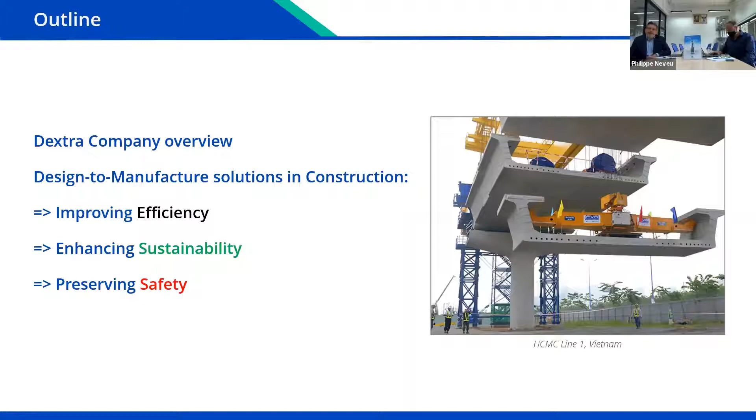So let's start. Very briefly about Dextra. We are a French company with the particularity to be established and headquartered in Southeast Asia since 1983. Actually, our home base is Bangkok, Thailand. And we are now from Asia operating worldwide with various facilities, manufacturing facilities in Thailand, in India, and in China, and around 900 collaborators worldwide.

So just to illustrate a little bit for you what we do, we are in a business of what we call connectivity and structural integrity for construction. So what it means is we have many solutions, technical solutions that we design and manufacture, which are going inside those infrastructure that you see and that you use every day.

Starting from what we call concrete reinforcement products, which are solutions to connect reinforcement into concrete structures. Then we have a range of solutions for what we call engineered bar systems that are mostly to support roof, facade, as well as to put a structure into tensioning, like a bridge structure, as well as ground anchoring. And then we have a specific geotech product line, so solutions to anchor those structures into the ground and to stabilize the ground, solutions for tunneling, like rock bolting.

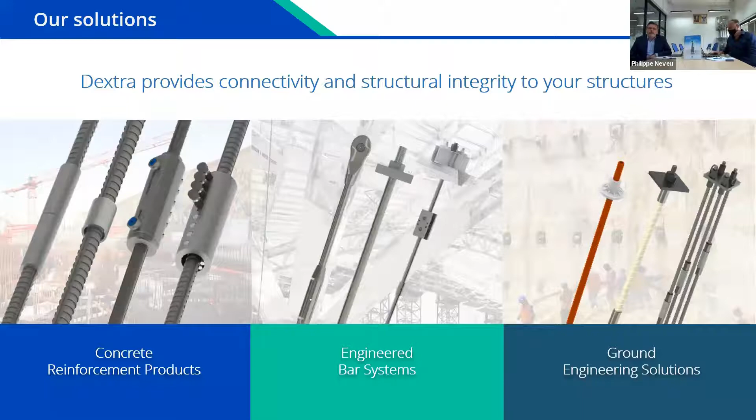And now I will leave Philippe talking to you about efficiency and how this DFMA approach for infrastructure projects can enhance efficiency for your project.

Okay, then good afternoon, everyone. So I'll be trying to be efficient in talking to you about efficiency in construction, and we will basically cover that topic from the approach of the DFMA. For those who are familiar with that acronym, it's Design for Manufacture and Assembly in Construction.

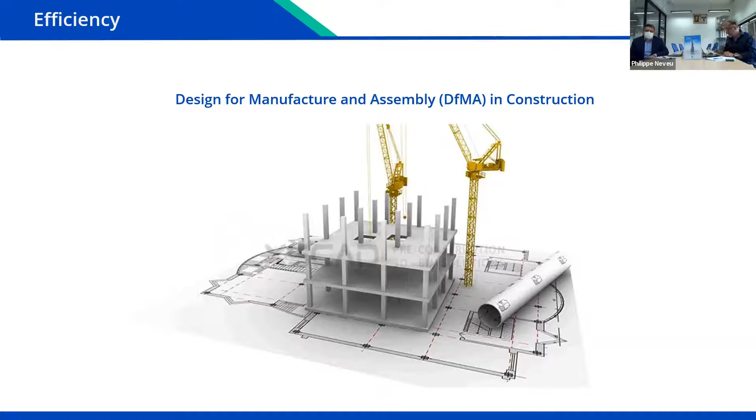So that means that we will, from the beginning, I mean from the design stage, actually consider the easiness of manufacturing the elements or the parts of the construction, and at the same time how to assemble those parts all together. We will see later, we will be talking about prefabrication, off-site fabrication. So there is an issue with the assembly of what has been manufactured off-site. This is why we call it design for manufacture and assembly.

To start with, actually, we have listed basically the main concepts that need to be addressed in pursuing this efficiency, and it starts actually with the definition and the observance of construction standards. I will not go through them extensively because you're probably familiar with them. The idea behind it is that there is a group of players in construction accepting a certain number of standards that may vary from one region to another. And the idea to start this DFMA approach is to follow or comply with established and well accepted standards. This is basically what we do at Dextra in all of the markets we are approaching.

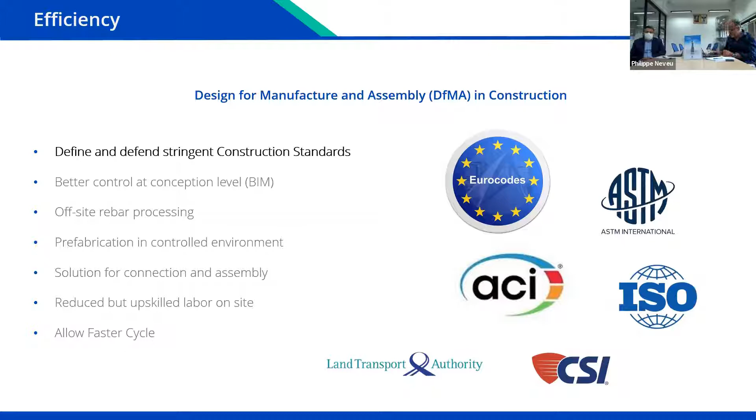Once the standard is defined and accepted, we move to the next step, which we generally call BIM - a principle supported by software that helps, from the design stage, anticipate all the future construction constraints you may be facing during the production of the building, tunnel, or any construction.

We also support this with a number of libraries that help designers integrate products. It's true for Dextra, but the idea is that it must be true for the entire scope of construction. This is the second step that needs to be observed to ensure better preparation of the construction, and maybe more importantly, to anticipate any issues on site before the actual production of the project.

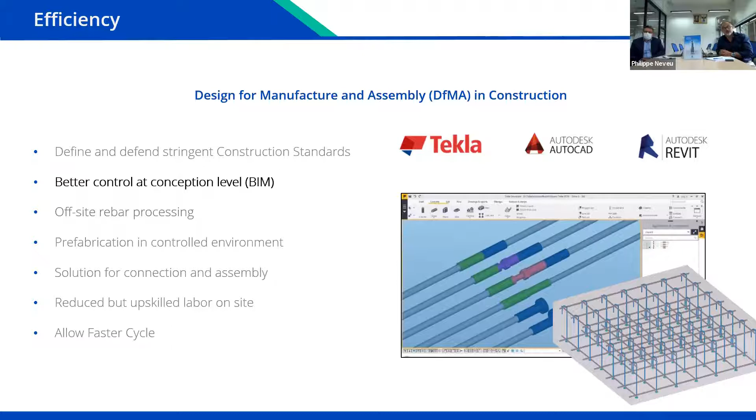So, pursuing this search for efficiency in practice, we see it starting in our business from the rebar processing. Rebar is an important part of any concrete construction, because concrete never goes without reinforcing steel. So rebar processing actually starts off-site.

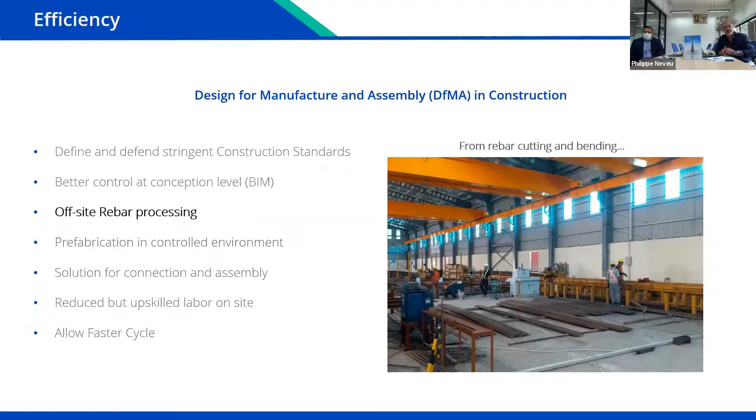The idea here is to have better control in a clean environment. You can see here a workshop that is covered, so if it's raining there's no issue with the processing of the rebar. This better environment helps to be more efficient in the preparation of the steel rebar, which starts as straight bars but will eventually be bent and assembled before arriving on site. So the first step in the process is this rebar processing.

If we move to the second step, this is what we call prefabrication. Prefabrication is a pre-assembly of elements off-site - generally off-site, though it can happen on-site, but the idea is to do it in a controlled environment.

So that the well-calibrated, well-assembled group of rebar - caging, in this particular case - arrives ready to use on site. That's one part. We've seen the rebar cutting and the cage fabrication.

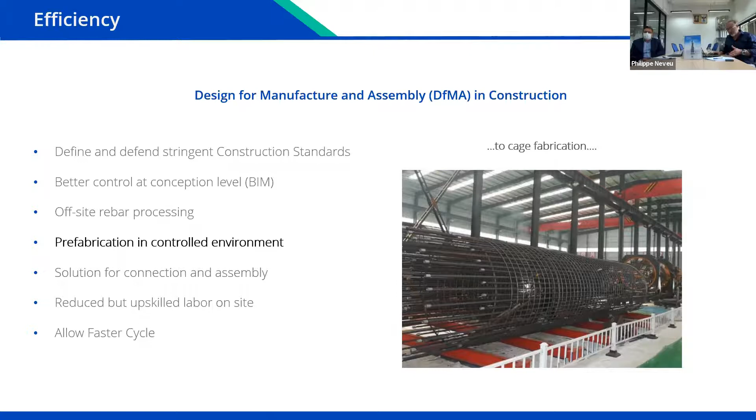The next step, besides this prefabrication, will of course also cover precast. Typically, to cast concrete you have two solutions: either you cast in situ, or you precast it in a yard next to the job site, or again in a precast factory controlled environment. That helps to have better control and monitoring of the element you are producing.

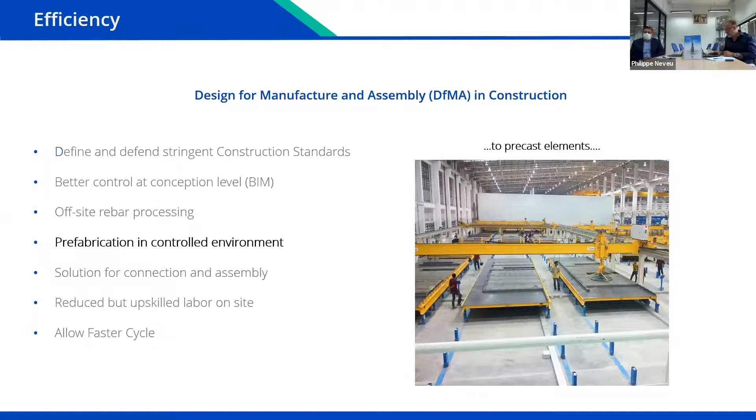If we move on with this prefabrication concept in a controlled environment, the next step of this process is to go to modular construction. Modular construction - I'm sure you've heard about it - is actually the latest evolution of prefabrication. We started with precast, 2D elements like a wall or a slab, and then step by step we moved towards cubicles, towards complete rooms or 3D volumetric elements, which are not only pre-assembled but could also be pre-decorated.

Typically, we have people here from Singapore - you are familiar with the HDB units, and more so the PBU, the prefabricated bathroom unit, which are pre-decorated and pre-finished off-site and brought to site for assembly. This is only one example, because modular construction is booming. It's becoming more and more popular, and this is definitely a trend - the latest evolution of the prefabrication concept.

Last but not least - maybe this is another story beginning - is 3D printing, of course. That's still quite new, not yet widely used, but it's definitely something that must be considered in the construction industry, because step by step we will see more and more applications for this 3D printing.

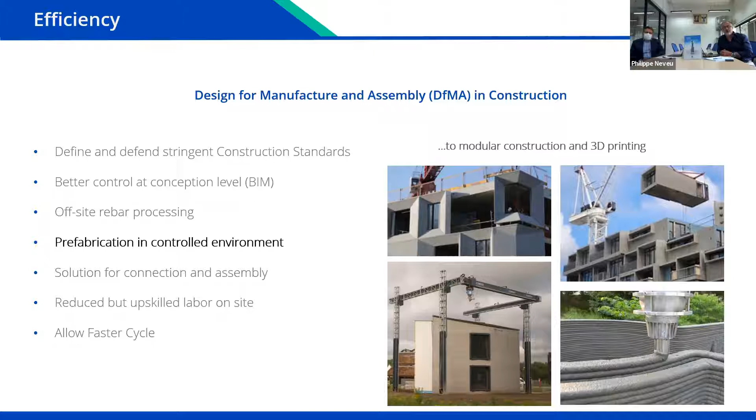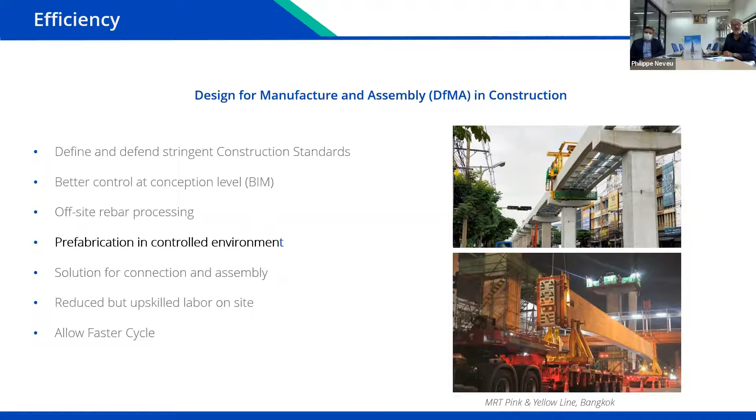Here we typically see what we call the guideway beams - those big beams that will be supporting the train, the rolling stock - which are prefabricated, pre-assembled, and brought to site to be combined together with the main piers of the elevated railway. So this is just an example of application, among others, of this prefabrication approach to the job site.

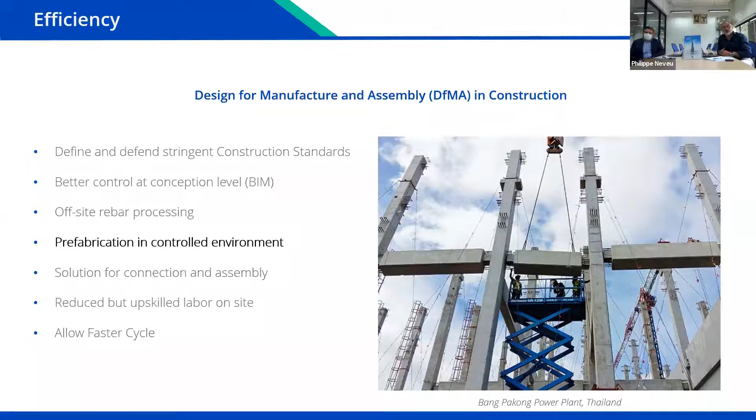Another project here in Bangkok, also in Bang Pakong. This is a power plant, and you can see clearly that all the columns and beams are prefabricated and assembled directly on site. In order to do that, and this is where we come into play, you need to develop certain solutions, because those precast or prefabricated elements need to be assembled on site, and you need specific connectors to allow the assembly of these separate elements.

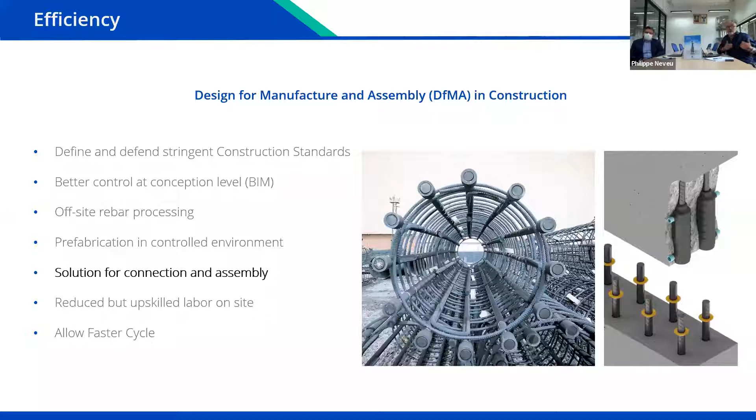So to illustrate what I just showed you minutes earlier, we have developed specific connectors to help the assembly on site of the precast elements which have been fabricated offsite.

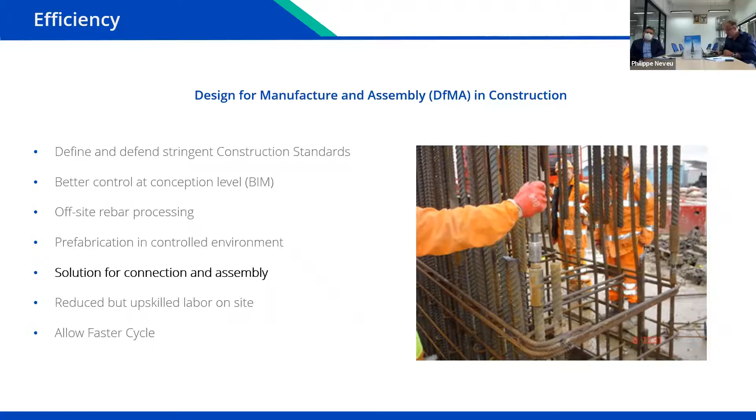Another aspect of this design for manufacture and assembly approach is that basically you reduce the number of workers, since a lot of elements are pre-engineered, fabricated, and pre-assembled off-site. Of course, when it arrives on-site, there is less need of labor for the final stage of construction. On the other hand, we tend to believe that it requires more skilled workers than today. As you can see in this picture, the workers are not here to carry bags of sand - they are here to assemble quite accurate elements to finish up the building or any construction they are doing. So the level of skills of the worker will definitely have to be uplifted to be able to finish this work that started offsite.

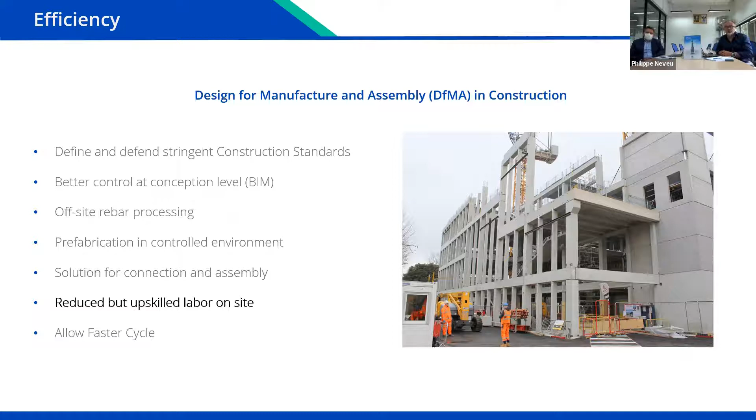And finally, if we look at some sort of conclusion of what has been shown minutes ago, basically at the end - and this is why we are talking about efficiency - at the end of this cycle, the result is that you have a much faster cycle of your construction. I think it's been already demonstrated that precast allows you to accelerate the cycle in the construction site. Not only precast, but the fact that you follow standards means there is no surprise in the delivery that you will do on site. The BIM conception allows you to anticipate future problems, and if you have no problem, of course you have less downtime on site. And then all the series of off-site processing, with the prefabrication, helps you develop a project faster, improving overall efficiency.

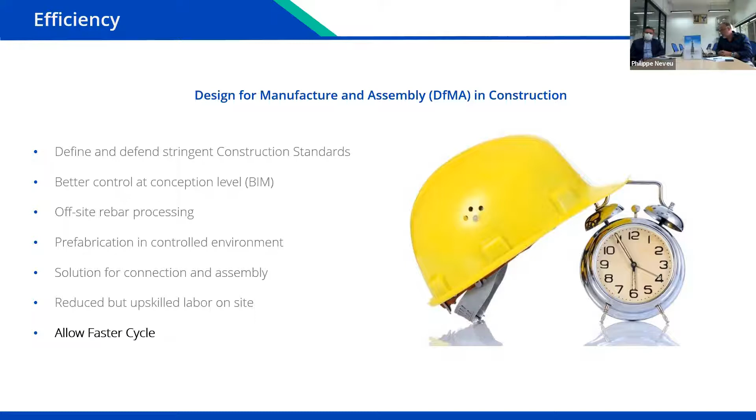So actually, the DFMA process, when implemented for construction and infrastructure, doesn't only have benefits as far as efficiency is concerned, but is also beneficial in terms of the sustainability of your project. And it starts again from the design stage, because when we share a digital model of the structure that we intend to build, obviously this shared 3D model can be shared among different remote locations.

People don't necessarily have to meet physically in the same place. It's all on the digital platform, meaning less drawings, no more paper to print, and we can also learn and replicate, copy-paste some parts of those structures for future projects in an efficient manner. So it actually reduces and optimizes the design cycle and makes it sustainable, because there is no carbon emission when people have to travel here and there. You can actually design a project with teams somewhere in one country in ASEAN, and project delivery can take place elsewhere in the world without necessarily having the teams meeting. So that's one of the first aspects.

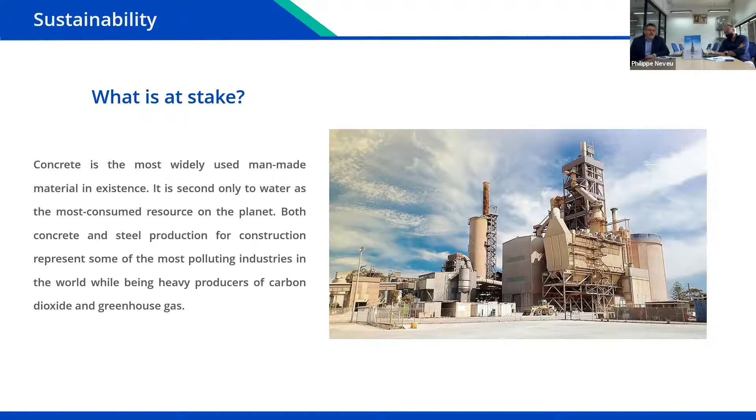So in general, reinforced concrete is not great for the environment. However, it's still a very efficient manner to build our infrastructure. We haven't found better so far. Now, having said that...

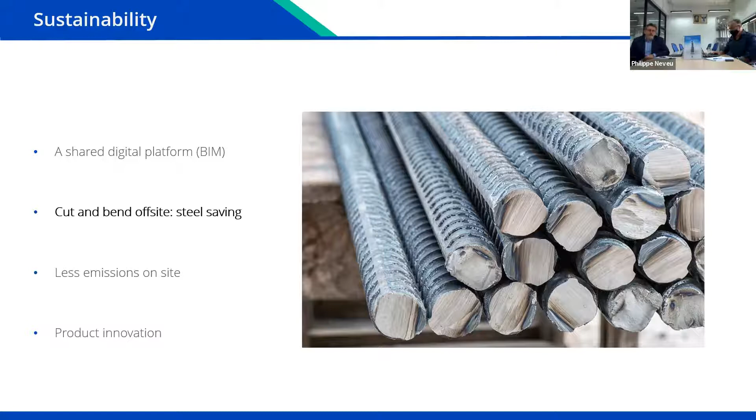This is where we can bring in existing solutions to reduce the consumption of this material, being steel material, rebar in that case, what you can see in the picture, but also concrete material, by using a different kind of construction material, elements, accessories, which will optimize this consumption for your project.

Another aspect is with off-site manufacturing, then you have much less activities in the construction site, which are big emitters of particles, of dust, again, of carbon dioxide. One can imagine the difference between what you see in those pictures and sites that we have seen earlier on, where the activity is focusing on assembling elements which have been made in factories. It's much less disturbance for the immediate environment and for the people nearby.

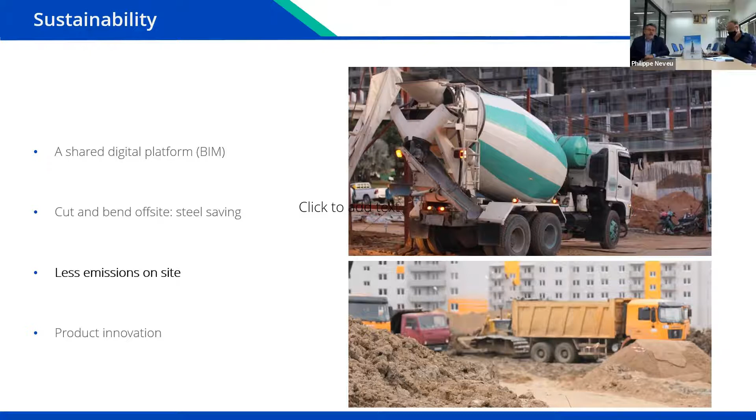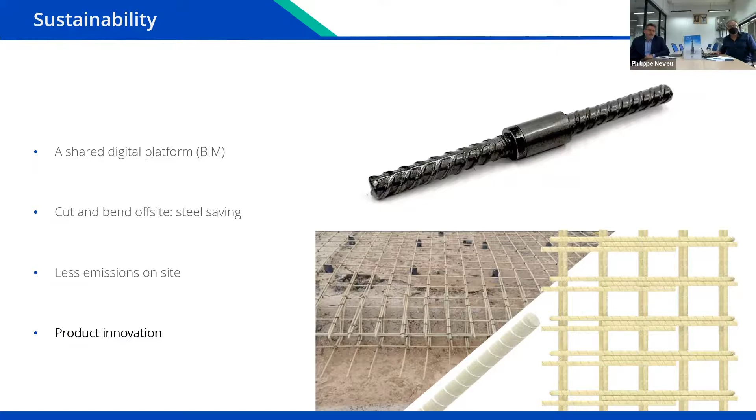So when we look at what's available in terms of innovative technical solutions to reduce this impact on the environment and optimize the consumption of material, one of those solutions is the rebar connector, the couplers that we talked about, and I will develop that in the next slide. Another solution is eventually to consider the complete substitution of the steel material with an alternative that is potentially a composite alternative.

Typically, you can save a lot of steel, first on the cutting and bending processing off-site, because generally it's more efficient to do it off-site than in the construction site. You have less wastage. And of course, when you use a rebar coupler and connector to reconnect those elements together, you save what we call a lap splice length, which is the traditional methodology of ensuring the continuity of reinforcement in the construction element. So you replace that lap splice with a connector.

So that means, in effect, less steel is consumed. You have less offcuts, less wastage, and at the end, you are allowed to reconnect easily on site.

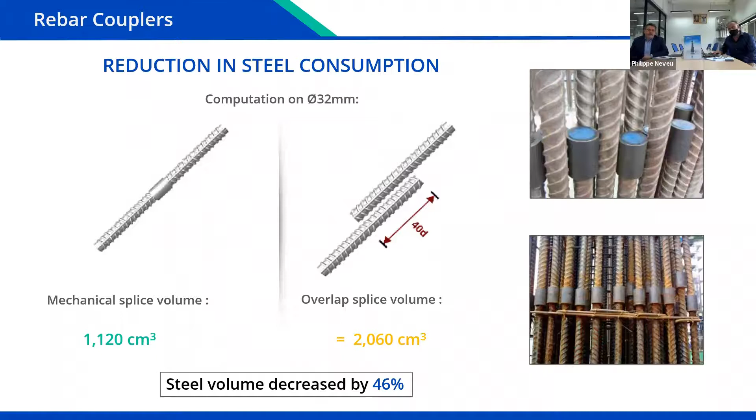And I mentioned earlier on about why not going one step further, when it is possible, and substitute completely the reinforcing steel bars with something else. That's possible now with products like FRP, fiber reinforced polymers, which are also in the form of a bar that is made of resin and glass, or resin and carbon, depending on the strength you want to achieve.

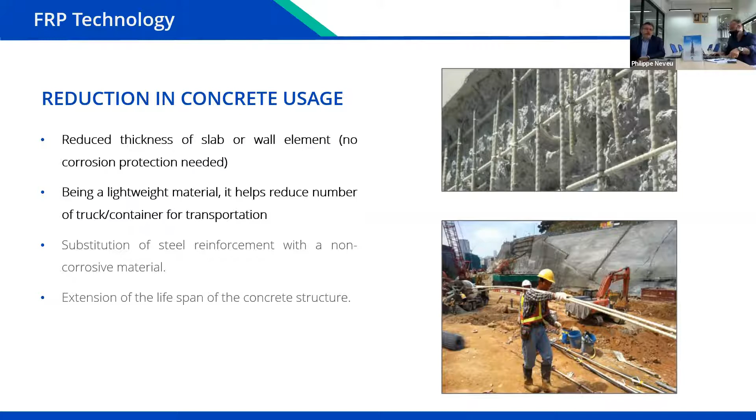And the beauty of this material is that, obviously, it's non-corrosive. So it means, in effect, it contributes to reducing the concrete consumption also on site, because the concrete cover can be drastically reduced, because you have no corrosion possible of the reinforcing of your structure.

Typically, that means also that you save a lot of money on maintenance and you ensure a longer lifespan of the structure. If you see today, one of the challenges in many markets, for many countries and authorities, is the renewal, maintenance, and repair of existing infrastructure made of concrete, reinforced concrete. This picture illustrates it perfectly on the top.

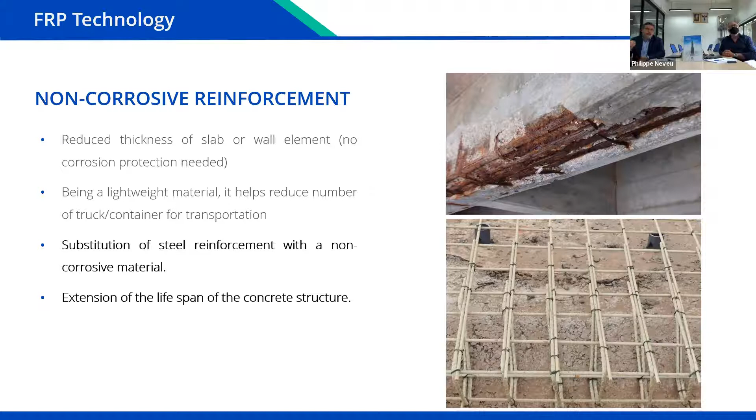Reinforcing steel corrosion is a main issue, and one way to resolve that problem is to substitute that steel with FRP again.

And other solutions which are also very innovative for future infrastructure projects, which are already available in the market and in place and been implemented in many ASEAN projects, are using the same composite FRP material for ground engineering, soil retention.

I think later on we'll have our colleagues from the company Menard developing that further on, geotechnical solutions that allow anchoring structures onto the ground without having to remove the anchor later on. So you can leave FRP material on the ground and still develop future infrastructure next to it, because this material can easily be crushed by excavator, which is another benefit.

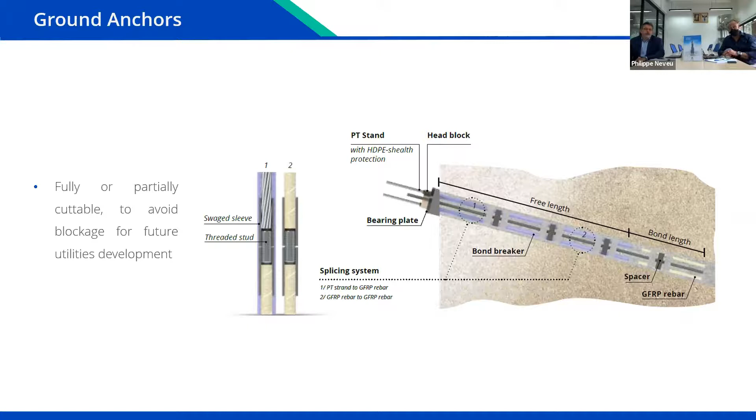And last but not least, this material can also be associated with strain gauges, so you can have complete and permanent monitoring as part of the Internet of Things. You can put sensors into this material to monitor the strength of your excavation, how your excavation is holding up, how your slope is holding up. So it also facilitates the maintenance and control for the authorities.

So there is a third benefit of moving into this next gen approach of building infrastructure. And the third benefit, not the least, is actually safety. Philippe will say a few words about that.

This is the last part of the presentation, and it's important. Safety can be seen at different levels. There is the safety of people, and right now we know the safety of many people is at stake with the COVID pandemic. There are other aspects too of the safety of people at work. But not only this, there is also the safety of the project itself, the safety of the construction itself.

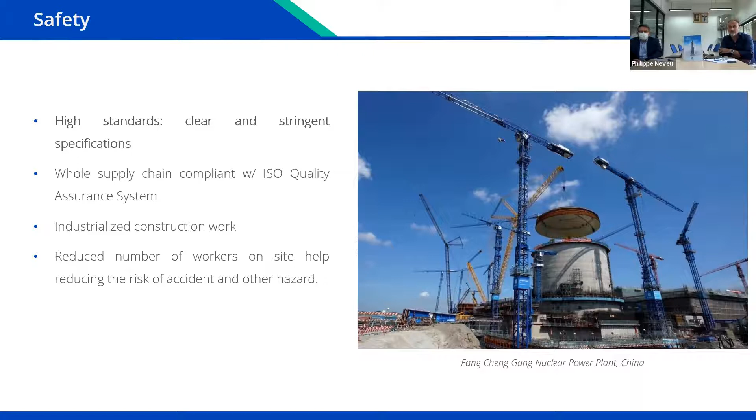So it goes back to the first part of the presentation: following a clear standard is utmost important to ensure the safety of the project. Sometimes this gets set aside, but we want to repeat that it is very important to respect and implement these high standards in the specification.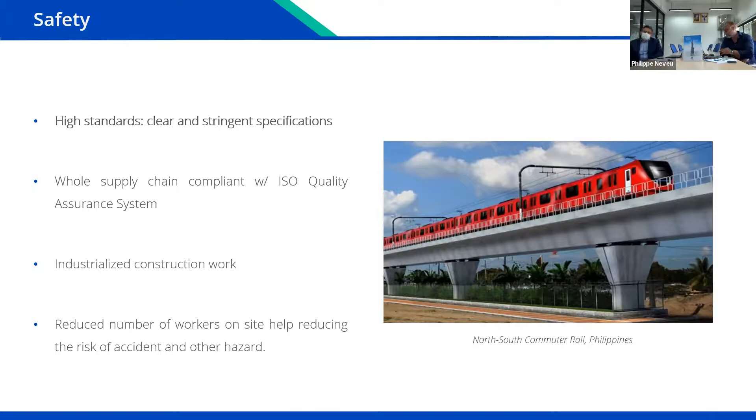Another safety aspect we tend to forget is terrorist attack. It's related to a building in this case, but it can also apply to a bridge or any other infrastructure construction. This follows a certain specification over the behavior of a building or concrete structure under bombing or impact. It's important, because whether the standard is observed or not, the result is not the same. This picture reminds us of the importance of this specification.

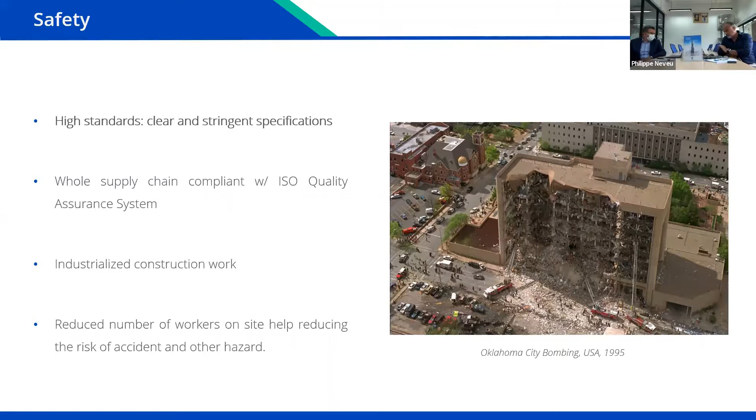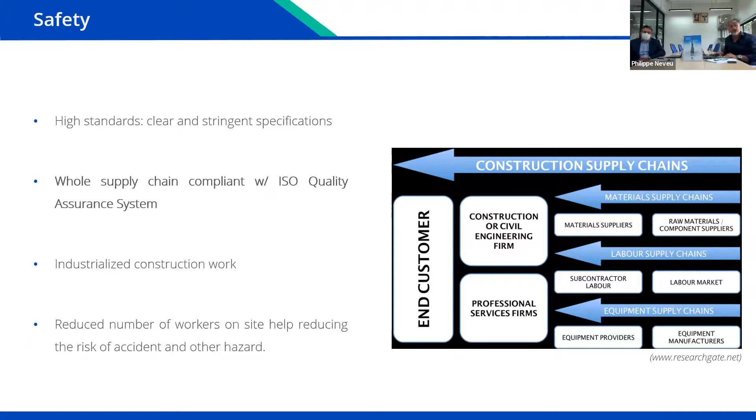The next point covering the safety aspect of what we do is the observance of what we call a quality assurance system, covering the entire supply chain. Referring back to the earlier part of the presentation, it's important to follow that from conception until the final delivery of the project. A clear compliance and observance of a quality assurance system is, in our industry, a guarantee and a strong help to achieve safety from beginning to end. This is something of importance that we felt necessary to mention.

On another level, safety can also be observed and enhanced with the industrialization of construction work, as we've seen earlier. The idea of pre-fabricating and pre-assembling construction elements in a factory, in a controlled environment, will necessarily improve the safety, not only of the workers. You see here on the picture a somewhat messy job site on top, whereby on the bottom you have a very clearly organized workshop.

Definitely, we enhance the safety of the worker. We also, in doing this, enhance the safety of the construction, because at the end it will be built in a better way, in a more controlled way, than if everything is done on site. So the trend of all this prefabrication, pre-assembly, industrialization of construction goes towards the goal of enhancing safety for the people and for the construction.

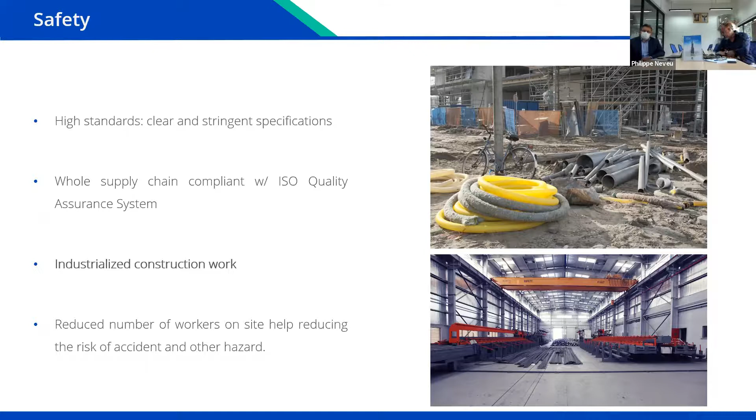Last but not least, we saw earlier that this off-site approach, prefabrication, BIM approach, has ultimately the consequence of reducing the number of labor, the number of workers needed on site. And mechanically, of course, if you have less people on site, you are reducing the risk of accident, or the hazard that can be caused by the presence of a lot of people at the same place.

It was easy for us to mention the COVID issue right now, but typically it is easier to implement proper site access and teamwork with a smaller amount of labor than if you have 1,000 of them on a job site every day. So definitely this approach of construction helps ultimately to reduce the risk of accident or other hazard for the worker.

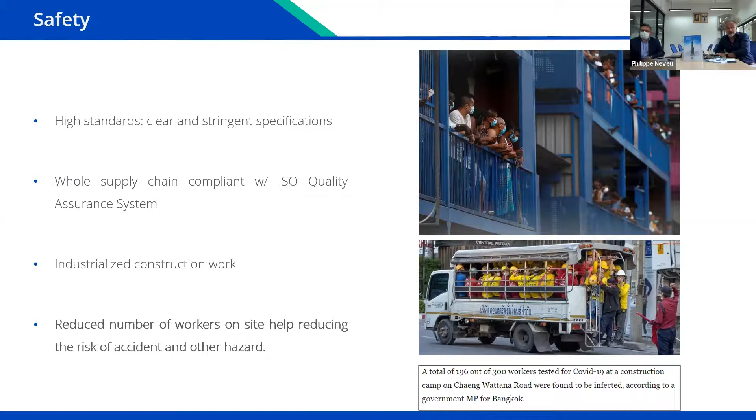And I think that's about it for the safety. I will maybe pass the floor back to Hervé. Thank you, to wrap it up. Just on time. Yes, thank you, Philippe.

So just to sum it up, what we have seen is that what we start witnessing in some ASEAN countries and markets progressively, in some markets more than others, is the industrialization of construction already well in process. We see design evolving and specification evolving towards something more shared and more efficient and digital.

Definitely, as far as specifications are concerned, we can take the example of infrastructure projects like in Singapore with LTA, where clear sets of specifications are in place, which helps at the end the whole supply chain and the contractors and the suppliers like Dextra to be clear on what needs to be achieved and what needs to be delivered.

In terms of BIM, so design, as I said, this is definitely an efficient way to design your next infrastructure project, so that you can get on board all the players and ensure the buildability of your project ahead by simulating everything on a model and get everyone on the platform, and potentially use that for your next project as well.

So many benefits for this approach, as we have seen, better structures at the end of the day, which are built on time, which are built on budget, and which ensure the quality expected at time of concept. So basically, that means also a guarantee for a long lifespan and life of the structure. Enhanced safety and sustainability, as we have seen.

So this industrialization and the investment in providing more technology and innovative product into construction pays off at the end of the day, not only economically speaking, but also for our environment and for the safety of the stakeholders involved. So that's the best legacy we can have to the next generation.

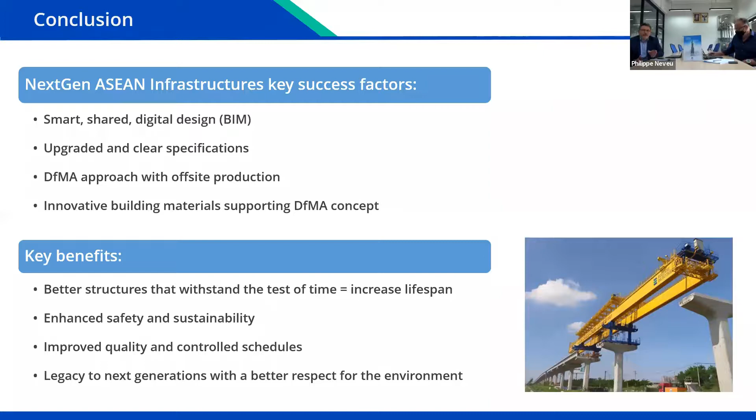Meantime, we address some questions. There's been no specific question raised until now. There are some questions actually. Hervé, yes, I'm just looking at them in the chat. Yes, we have a chat question. Yes, from Julie: Are you able to simulate virtually the connection interface and anticipate clashes before you actually do it on site? Yes, the answer is yes.

The idea of developing libraries for our connectors takes into account the dimensions and all the features of the connectors. Those are, of course, a small part of the whole element assembly. But the idea is that by putting those on the BIM itself from the beginning, you are able to validate if there are some issues of clashes. Also, usually when you design 3D reinforcement in 3 dimensions, you will see that you have congestion issues. So this is where you can use those libraries of connectors and replace potentially laps with connectors to resolve those steel congestion issues, safeguarding the ratio of steel to concrete that you need to maintain for your project. So definitely 3D modeling is the key to simplify execution later on site.